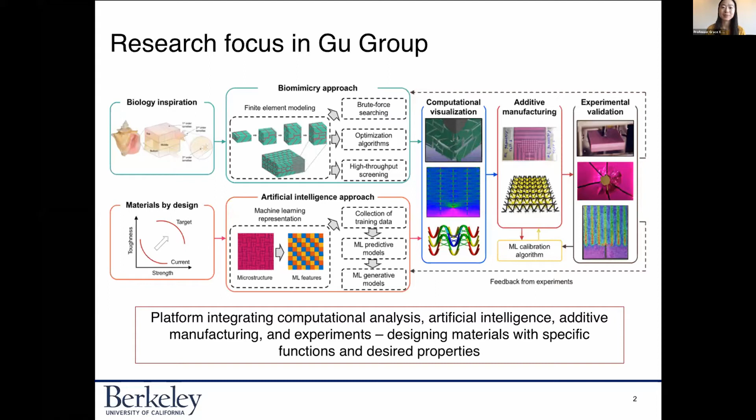So in general, we're really interested in developing and designing new materials for various applications. And we're excited to apply our frameworks to the applications in soft robotics. As we know, soft robotics, owing to their compliance, offer reliable handling of delicate objects, better durability, and safer human-machine interaction over conventional robots. And their soft actuators are mainly powered through two means. One is hydraulic or pneumatic pressure, or secondly, the pulling of artificial tendons.

And for our work, we were interested in focusing on this first approach where we actuate using pressure, for a couple of reasons. One is that it's usually due to simplicity in assembly. It's also very compatible with 3D printing, and we can reduce the number of parts or motors needed for our system. So we're going to focus on this idea of pneumatic actuation for soft robotics.

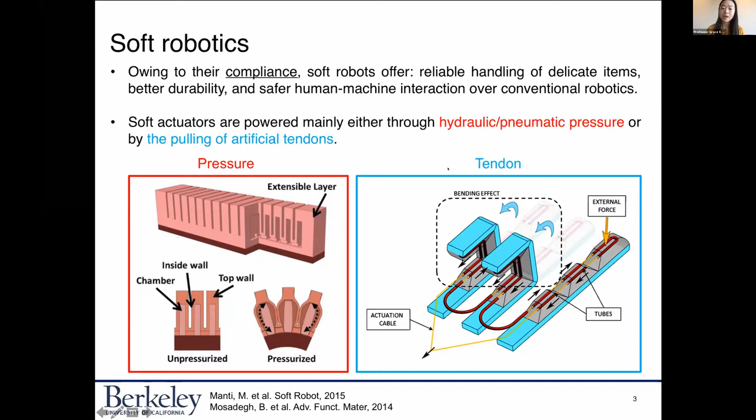Here are some examples of pneumatic actuators developed in literature. And some of these current designs face challenges when it comes to dexterity, so poor control over intricate motion. And the reason is that these designs extend through the entire length. You can see that these kind of bellows extend through the entire length. And so we were wondering, what if we tried to mimic hands by adding joints to these kind of designs? Maybe it will help to overcome some of the limitations in pneumatic actuators.

And so we're really interested in developing this composite design made up of soft joints connected by rigid parts. And so the question that we wanted to answer is, how should we design this soft joint? What kind of tools do we need? What kind of materials should we use? And what should it look like? We're trying to focus on this soft joint that's connected by these rigid parts. And hopefully with our designs, we can help to increase dexterity of these soft pneumatic actuators.

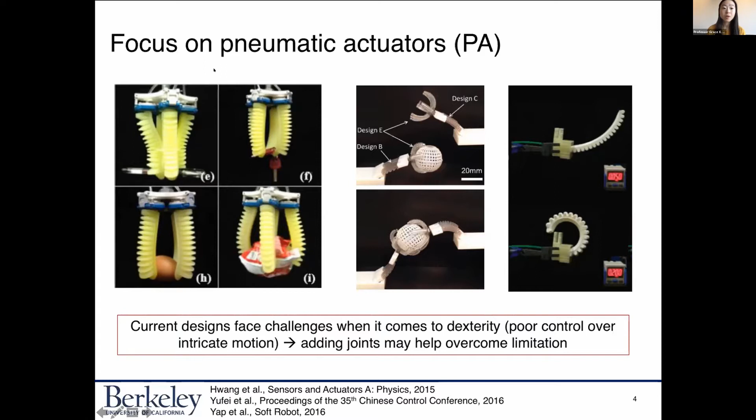So before we actually jump into the design, we were looking into what kind of performance criteria we should actually design for. What kind of things do we actually care about? There's three things that we pinpointed. One is range of actuation, so this bending angle. Oh, and I want to point out this is the composite structure we're looking at, where we have these rigid parts, shown here in black, connected by soft joints, which are shown here in red.

And so one of the first performance criteria we're thinking about is basically the range of actuation, or this bending angle that these joints have. This will allow us to pick up objects that have weird, very complicated shapes. The second performance criterion we're looking into is actuation force, or torque, being able to pick up objects that are very heavy.

And lastly, range of actuation is very important, and also torque is very important. But if it only lasts for one cycle, perhaps in a warehouse, then it's not as useful as we would like. And so the last performance criteria we're hoping to look into is fatigue. So being able to develop something that has great performance in the first two, but also being able to last for many cycles in the warehouse.

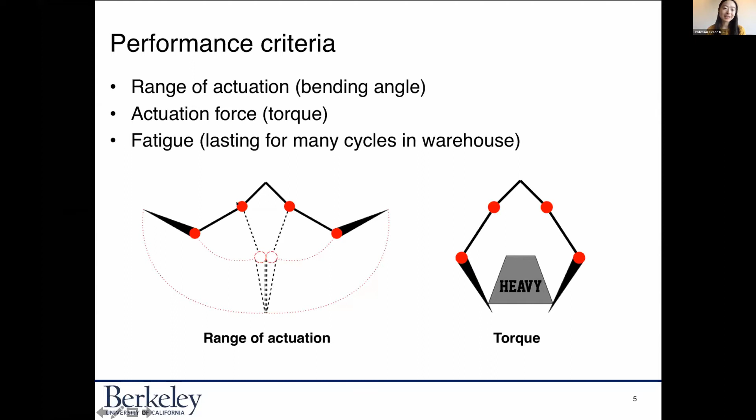So these are the three performance criteria that we're trying to design for. And in general, we understand that the design of this joint, so this is an example of it, let's just say this is pinpointing the joint, and here it's actually being pressurized. The design of the joint is going to affect the performance criteria or the properties of this joint, or the properties of this entire gripper.

And so we want to understand fundamentally what are the structure property relationships in this entire system? How does design actually dictate the performance? And so for our first study, we wanted to focus on range of actuation and design for bending angle. So let's just say this is a soft joint, and this is the angle here. We want to maximize how much it bends, and so we want to develop this framework to optimize the bending angle for this soft joint.

And we're going to use numerical simulations called finite element simulations to do this optimization problem. Secondly, we want to actually validate our results using 3D printing and experiments. And we were interested in 3D printing because it allows for fast prototyping, and interfaces well with soft robotics.

And then lastly, we actually want to create this entire gripper design, this composite structure I was talking about. We want to develop this full gripper design with soft joints connected with the rigid components, and actually pick up objects of various shapes. And so I'll show that at the very end.

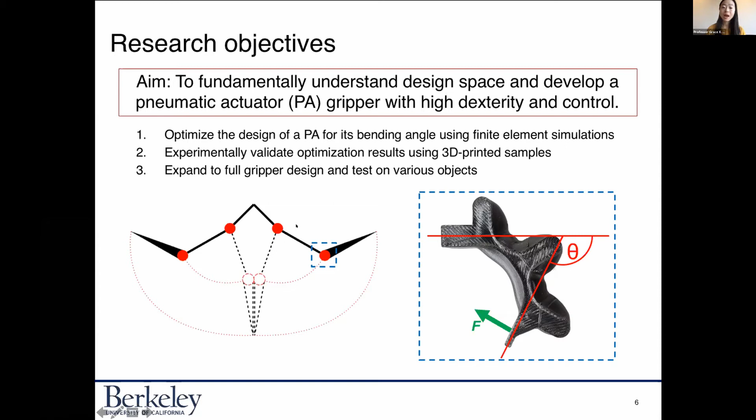And so here again, our goal is to understand the entire design space. How does the design of the soft joint affect the performance or the dexterity and control of the gripper? The first step usually is to create our model, and we want to parameterize our joint. Our design space is large, but we want to narrow down and focus on the important parameters for our study. And I would say that this is the step that we spent a very long time on, figuring out what are the actual parameters that are important.

So we did some preliminary simulations and also preliminary experiments to narrow down what kind of parameters are important. Some parameters, if you increase or decrease the size, it doesn't really affect the range of actuation or bending angle, so we didn't want to focus on those. And so here, we really narrowed down to three main parameters. Let's just say this is the joint, and these I'm going to call bellows. One parameter that we found was pretty important is the width of the bellow. Another is the height of the bellow. And we also looked briefly into the thickness or the depth of this joint.

So this one step is to figure out these parameters. The next step is to figure out what kind of materials we want to use. So we started off using TPU. And TPU was fine for printing, but the range of actuation wasn't as high as we would like. And so we moved on to one of the very soft materials that can be printed using fused deposition modeling, or FDM printers. This material is called NinjaFlex. Perhaps some of you have worked with it before.

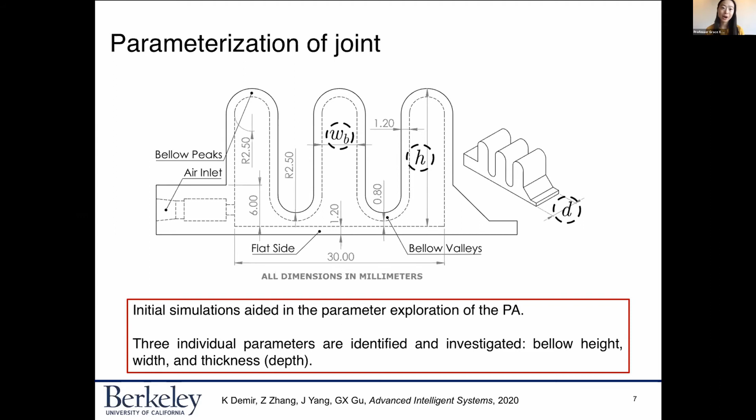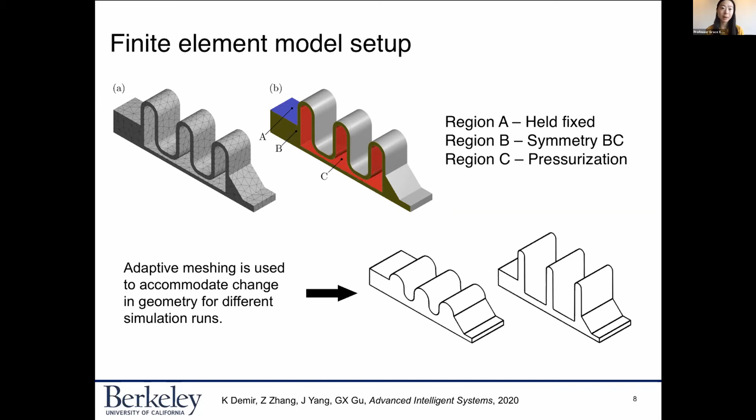So this is a parameterized joint, and we wanted to create our numerical model. Again, we use finite element analysis, and these are the boundary conditions. Region A is held fixed. We have symmetry in region B, and region C is the region we actually pressurized in our model. We can see that our designs can range very widely, so we use adaptive meshing to accommodate changes in geometry for different simulation runs. We ran hundreds of finite element simulations to train a support vector regression model.

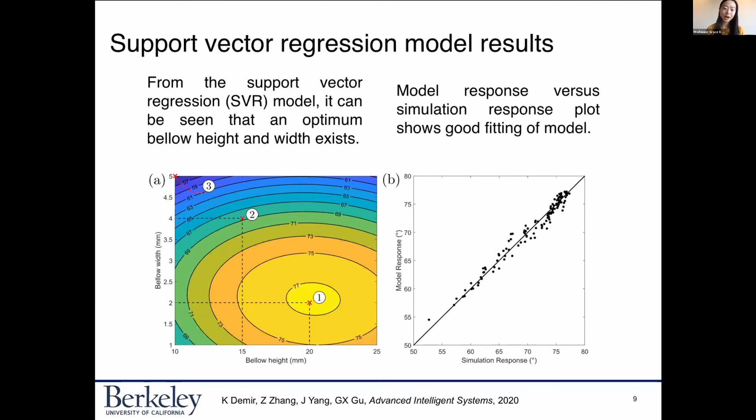Here I pinpointed 3 points, and we want to see what these designs with vastly different performance actually look like. We also wanted to validate our simulations, so we 3D printed these 3 designs, and they're shown here actuated, so you can see how much they bend. These are our 3 simulation results; we did a slice so we can look at the strain field. This is a comparison of bending angle from our experiments versus our simulation and our SVR model, and the experimental trends match pretty well.

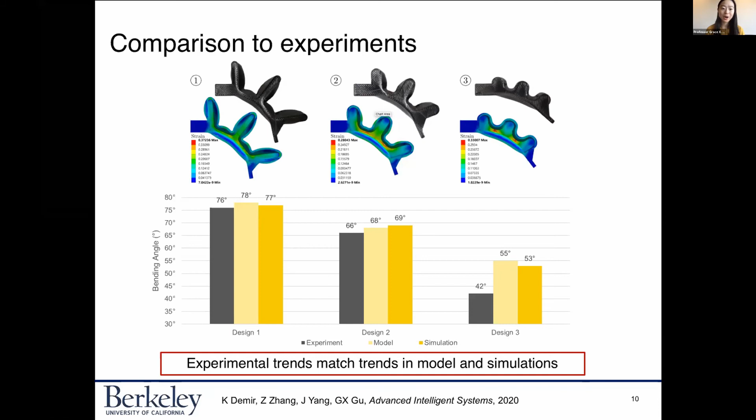What's nice is that once we have this validated model, we can change other parameters as needed and study different materials. That's what's nice about having this computational model. In addition to predicting bending angle, what we found really interesting is that we can see fundamental mechanisms happening during actuation that would be really difficult to see in experiments.

This is a strain field of a joint, and we took a slice. You won't be able to do this in experiments. You can see that what's driving the actuation is the side walls of the valleys of the bellows. When it's actuated, these valleys have pretty high strain, and they act like pivots, which enables the actuation. Typically, we found that thinner bellows result in wider valleys, which increases the compliance of these valleys and helps enable actuation. This is one thing we can gain from finite element simulations.

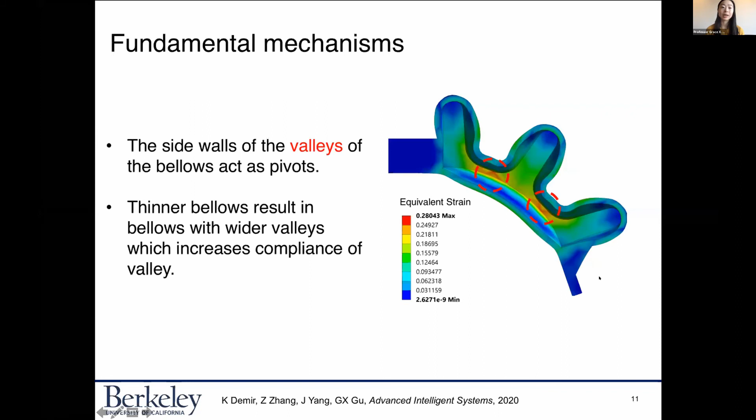So again, I mentioned briefly that we also looked into this thickness parameter. We found that in general, like with this bellow height and bellow width, and this is the performance from when we changed thickness, we doubled thickness. And we found that there was a factor of 2 increase in bending when thickness is doubled. So not a very significant effect, and not a very surprising effect shown here from the thickness parameter.

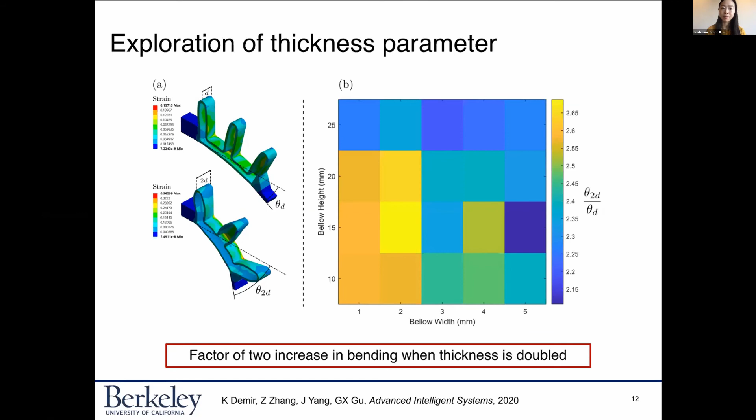And in addition, I know I'm running out of time. We want to look at how the bending angle changes with pressure. So these are experimental results. These are increasing in pressure and what happens to the bending angle, as expected. Typically, these again are for the 3 design points. If you increase the pressure, your bending angle starts to increase.

But what we found was really surprising is that we also looked briefly into torque in this work. Using a mass scale and a fixture, we plotted torque for the 3 different designs. And what you'll see is that the torque and the bending angle don't completely align. The design that has the best bending angle doesn't necessarily have the best torque output.

And so that makes us believe that there must be some trade-off here, and we actually want to explore this trade-off in future work, understanding, can we actually balance the two? Because we care about actuation force and actuation range, right? So how do we balance the two with our given design? And so that's sort of future work that we're looking into.

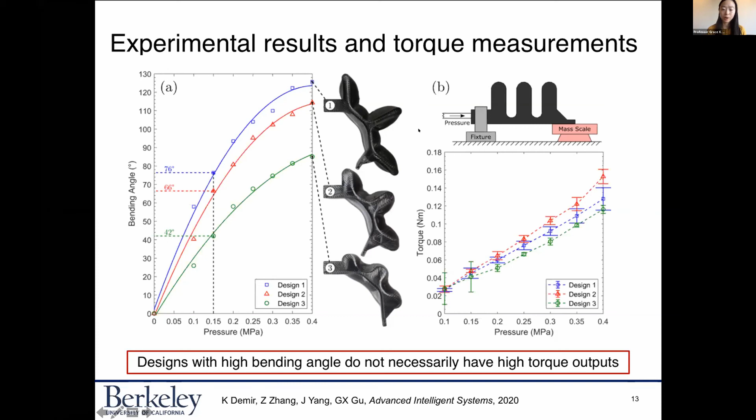And so I have 1 or 2 more slides. We talked about creating this composite design. And so here is what our soft gripper would look like. Again, here we have these soft joints, and they're connected by these rigid parts, and then they're actuated with pressure. They're all 3D printed, and connected by a Lego-like connection.

And we here show 4 different gestures, picking up really different objects. These objects are also 3D printed, and you can see that we can actually create this versatile gripper using this composite structure that can pick up a variety of different objects.

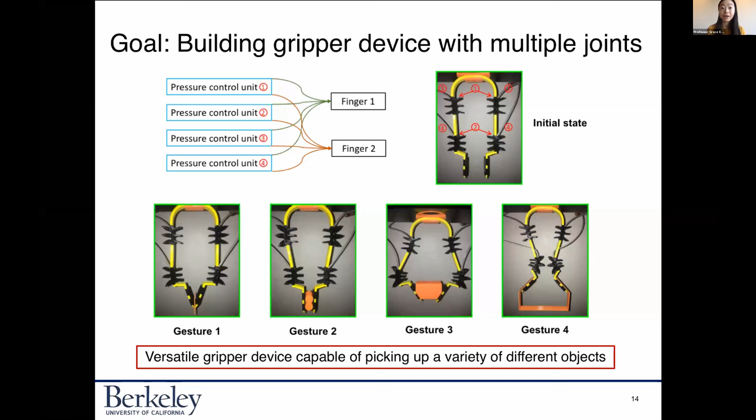And so this is my last slide. I mentioned also fatigue that we're interested in. Modeling torque is definitely possible, and we recently got some more results modeling torque in simulation. We found that modeling fatigue is actually really difficult. So if any of you have experience modeling fatigue of these robotic actuators, we would love to chat with you. In general, we're interested in how the number of cycles we use this actuator actually changes the bending angle or the range of actuation and the torque of these grippers.

So we envision that in general, for these two performance criteria, as the number of cycles you're operating in increases, performance would start to decrease. That's our general intuition. But how fast is this decrease for each of these performance criteria? Is it very steep? And is there a way we can actually change the design? Maybe we can face some other trade-offs to have a less steep decrease in these performance criteria. This is something that we're also looking into, and we'd love to chat if any of you have experience in this area.

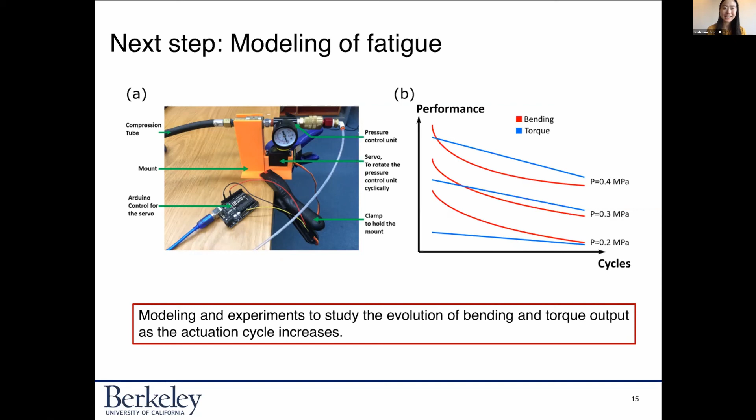Yeah, Grace, thanks for your talk. I think it's really a comprehensive approach, including design, a little bit of AI, and also computation. Thank you for your talk.